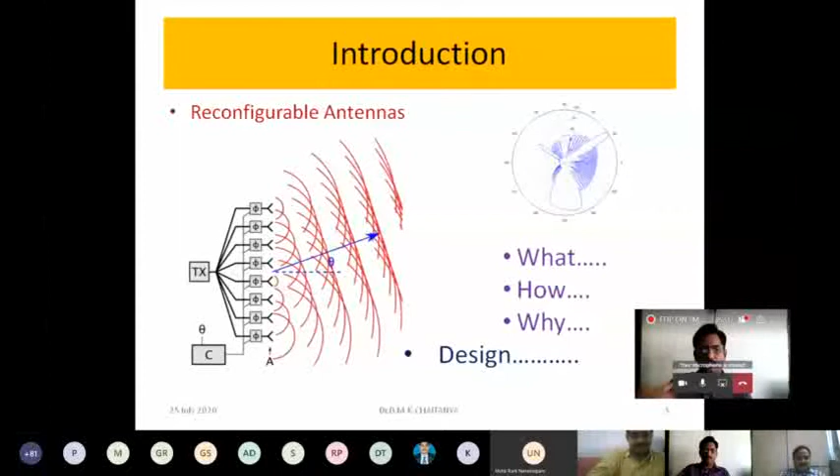Today let me start with some fundamentals as well as hands-on training with HFSS. I'll be using HFSS 15 version, an old version, but I'll give you the basic concepts. Design at RF and microwave frequencies has become more significant because of the evolution of new wireless standards as well as new wireless devices and technologies every day. So researchers found it more useful to work on the design of antennas rather than complex signal processing techniques. This has led to the design of reconfigurable antennas, which requires specialized antennas to make use of the electromagnetic spectrum very effectively. So the concept of reconfigurable antennas has come into existence.

Let me start with the design of reconfigurable antennas. First, let me start with the electromagnetic spectrum. I'll take a few minutes on the basics so it will be useful, and then we'll go into a different point of view. As we know, the EM spectrum is the range of frequencies or spectrum of electromagnetic radiation along with their respective wavelengths. To prevent interference between different users, the generation and transmission of radio waves is strictly regulated by national laws and coordinated by the international body, the International Telecommunication Union (ITU).

They have been assigning different frequencies for different services. Nearly 40 radio services are defined by the ITU. In some cases, the spectrum is sold or licensed to operators of private radio operators, cell phones, broadcast televisions, etc. Because it is a fixed resource in demand by an increasing number of users, the spectrum became so congested and needs to be utilized more effectively.

That is what we deal with in the new technologies as well as in driving modern telecommunications. So innovations such as spectrum management, frequency pooling, and of course cognitive radio are the new technologies being utilized to use the electromagnetic spectrum very effectively. So we should effectively make use of the spectrum.

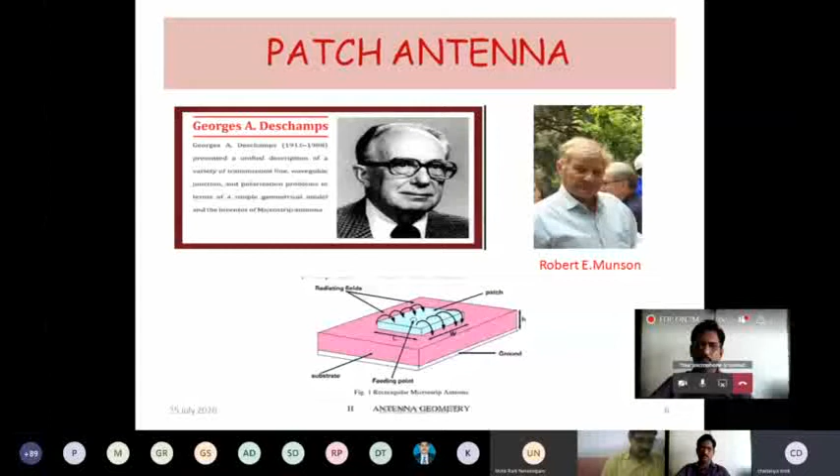Similarly, we have Zigbee, which works up to much lesser distances. Even Bluetooth works only up to 10 meters, with a data rate of only up to 1 Mbps. So these different wireless standards work with different data rates, ranges, and bandwidths.

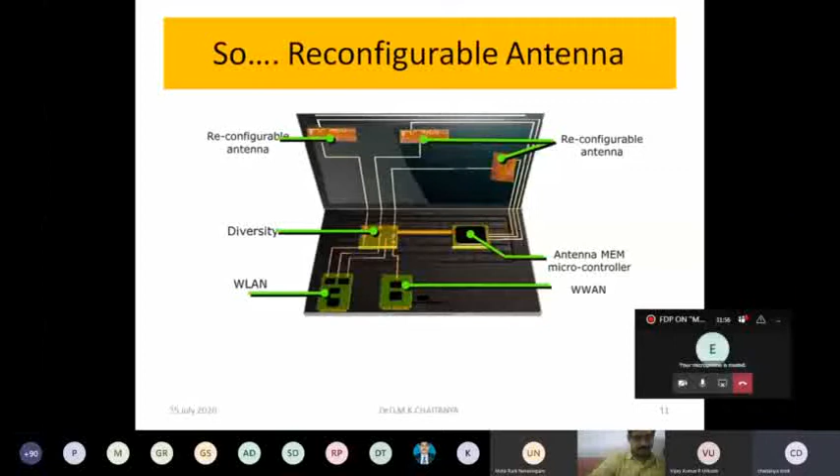Therefore, in order to support these different technologies and increase functionality, we need a single antenna - a reconfigurable antenna. What is meant by a reconfigurable antenna? It has the ability to radiate more than one pattern at different frequencies and polarizations. It can provide a diversity feature of operating resonant frequency, polarization, and radiation pattern without changing the physical structure.

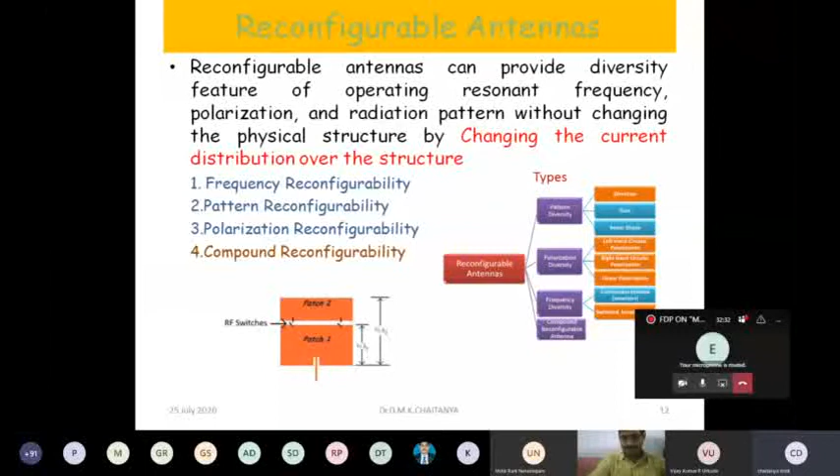How can we achieve reconfigurability? Only by changing the current distribution over the structure. What are the different types of reconfigurable antennas? We have frequency reconfigurability, pattern reconfigurability, and polarization reconfigurability.

Suppose the antenna is working at different frequencies, I just can use only one antenna rather than using different antennas for different frequencies. Similarly, using these antennas, I'll have only one antenna to radiate differently or in different directions. Similarly, the polarization reconfigurability, whether I need linear polarization or circular polarization, etc.

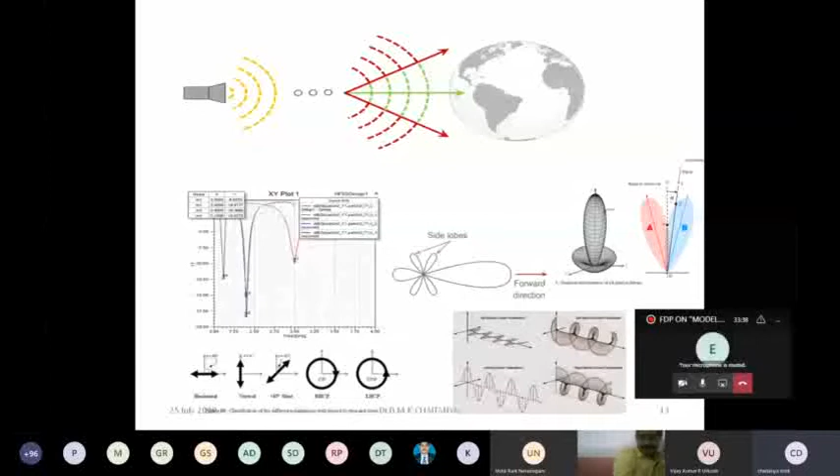Even yesterday also the experts have given the MIMO techniques and everything, which reduces the interference, which is useful for adaptive environments like cognitive radio, etc.

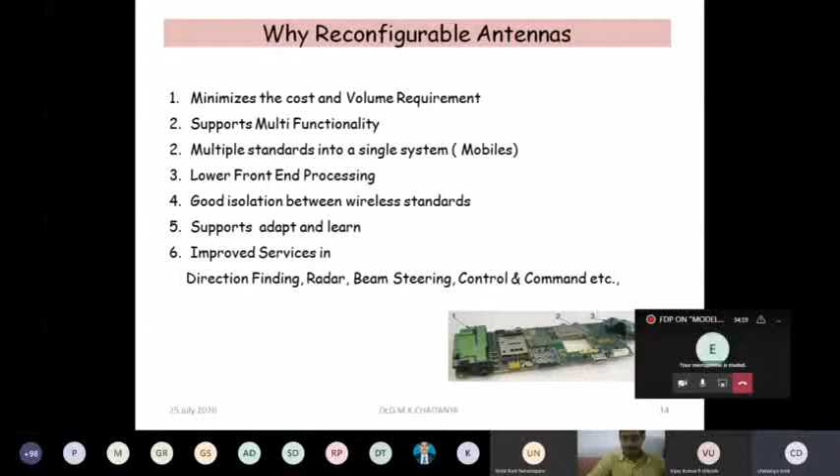Now, the reconfigurability, how to achieve the reconfigurability? It can be achieved by many ways, just like either by using electrical switching, or optical switching, or by changing the physical orientation of the antenna, or by changing the material.

Now, this is a fixed antenna structure. I am not going to change the structure, I am designing the structure like that. I may be using an electrical switch here or maybe optical switch, so that depending on the switching characteristics, the length of the antenna will be varying. In turn the current distribution will vary, therefore the antenna will be radiating differently with different resonant frequencies.

Now what are all the design considerations of the reconfigurable antenna? First of all, what are all the design considerations? The first one is the frequency. Similarly, the radiation pattern as well as the polarization.

I just want to tell a small thing for the young researchers here. The first most important factor to be considered for their research is the frequency — where it should be used, either for narrow band or wide band. Then we have to take these frequencies as per the guidelines of ITU, because most people select frequencies as they require.

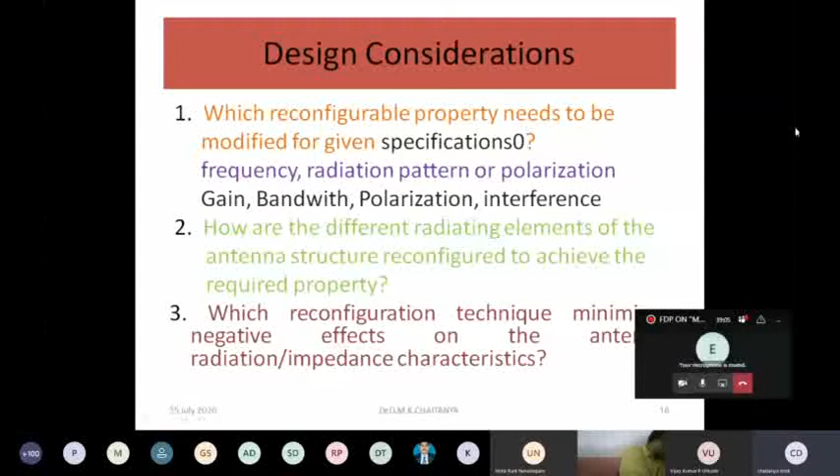So the general switching elements we come across in the design of reconfigurable antennas include RF MEMS, which uses mechanical movement in turn changed by electrostatic, magnetostatic, or piezoelectric effects. Switching means always on and off.

How do we achieve the on and off condition? RF MEMS can be switched on by using electrostatic, magnetostatic, or piezoelectric effects. Similarly, PIN diodes, in forward biased conditions, are in on condition; in reverse biased condition, they are in off condition.

Varactor diodes are similar to the PN junction diode, but here it is a variable capacitance. By applying a suitable biasing voltage, we change the capacitance, which in turn makes these switches either on or off. Similarly, photoconductive elements like lasers and LEDs can be switched on or off, achieved by using external lighting from laser diodes.

Whatever switching element we use inside the antenna, we can switch it on and off so that we may increase or decrease the length of the antenna.

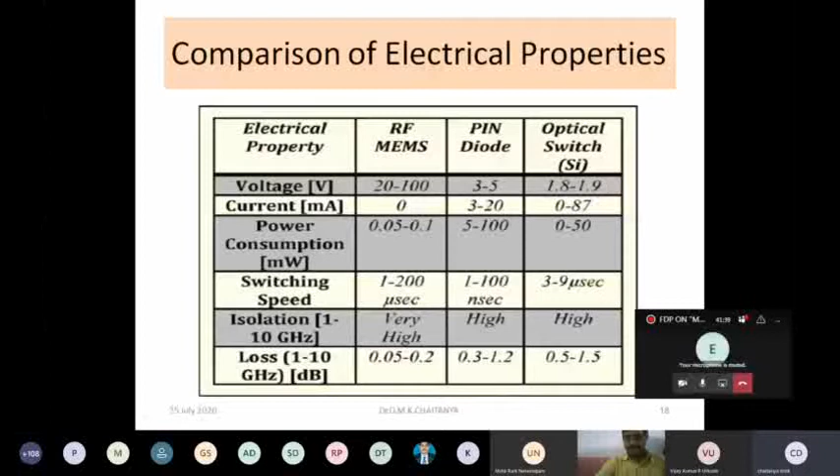What are the design challenges when designing a reconfigurable antenna? What is the biasing circuitry? If the biasing circuit or biasing network is complex, it makes the antenna complex. Why do we use biasing circuitry? In order to run these switches, to make them on and off, we require the biasing network.

This is given by vendors, or we may select it from anywhere. This is very important because it increases the complexity of the antenna. Similarly, increased power consumption will increase the system cost. There is generation of intermodulation (IM) products, which may result in increased interference. Similarly, switching speed is important to ensure proper functionality of the antenna.

Here are certain examples from the available literature on frequency reconfigurable antennas. You can see this antenna uses 4 varactor diodes. These are all the biasing circuits, which we have to drive in order to make the switches on and off.

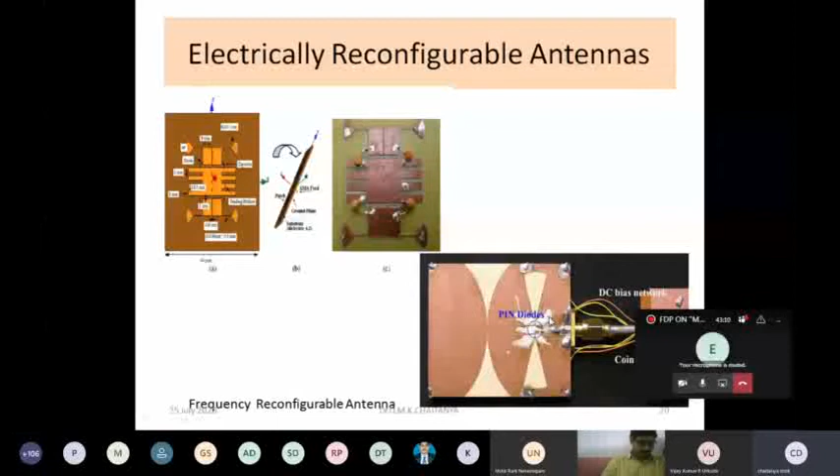Similarly, in one more design they have used PIN diodes, as you can see here, with the biasing circuit. This is an example of a pattern reconfigurable antenna, using different switches along with the biasing circuitry and bonding pads.

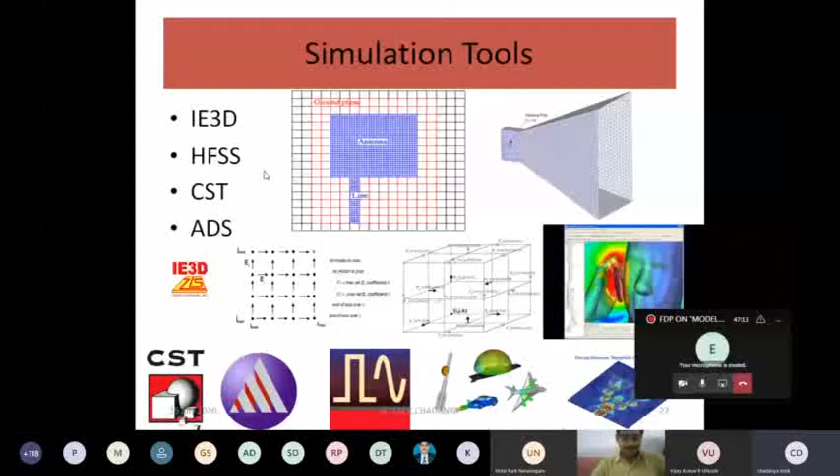There are different simulation tools available to carry this out, namely IE3D, HFSS, CST, as well as ADS. All these simulation packages are designed based on different computational electromagnetic techniques like FDTD, the finite difference time domain method, MOM, the method of moments, and the finite element method, as you are aware.

I want to mention one small thing about these computational electromagnetics techniques: all of them are based on Maxwell's equations only. But how do they implement the design? Suppose we use the FDTD method, which uses Maxwell's equations solved in differential equation form. Similarly, when we solve the integral form of these equations, the method of moments is implemented. Similarly, the FEM technique basically uses energy-based or energy minimization as a function. Of course, they each have their own advantages and disadvantages.

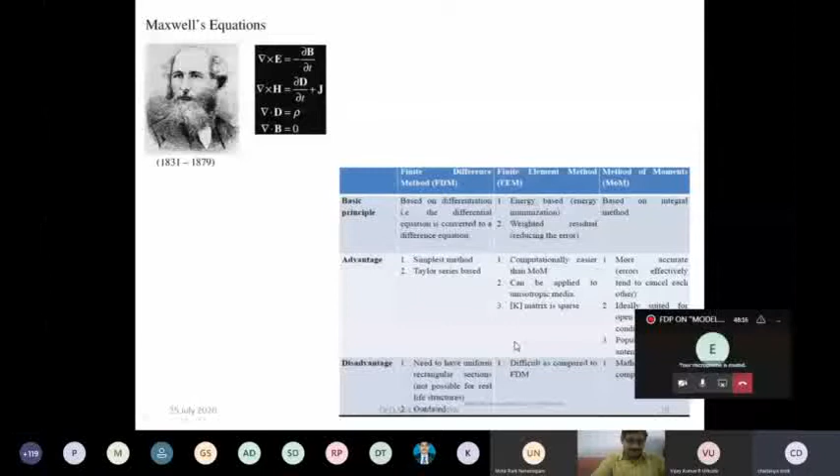Now, let me give a small point on how the finite element method works, because HFSS is based on the finite element method only. The finite element method basically divides the solving of the design into 4 steps. First is the discretization of the antenna elements into a number of subregions. Similarly, deriving the equations of each particular element, assembling all these elements and the solution region, and solving these obtained equations.

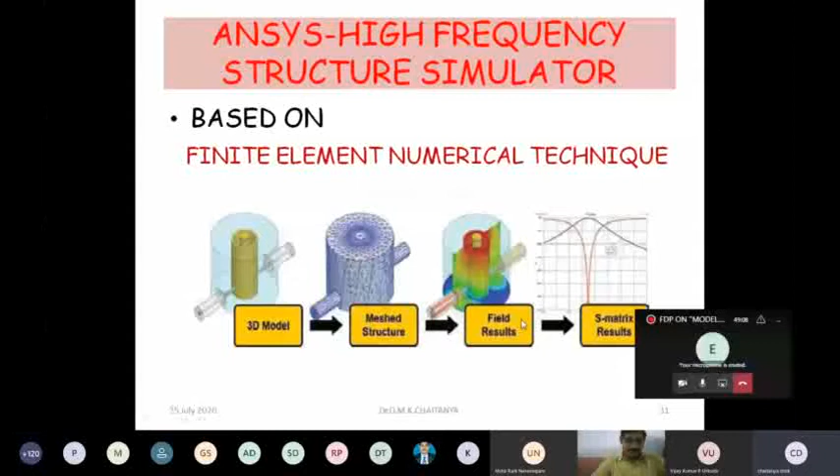Now, HFSS from ANSYS is based on the finite element numerical technique. The design is processed by converting the structure into tetrahedral meshes, and it calculates results based on energy functions. Now, what are the six steps that we have?

Basic design steps that everyone should remember: first of all, we have to create the model, then assign the boundaries, then go for the excitation, then set the analysis setup, then analyze and solve, then after that we get the results.

Now I just want to tell you about a small design of a compound reconfigurable antenna using ANSYS HFSS. Here I am using only the HFSS 15 version. Of course, there are the latest 19 versions which are sophisticated with different solvers and different kinds of applications, but we are not permitted to use them. Here I am using only 15. So let me start with this particular design.

Before going to this design, I just want to tell you two points: the dimensions of the antenna. Now here you can see these are all the dimensions of the antenna. They are calculated using the normal patch design equations. We have to calculate the width as well as the length, because of L effective minus 2 delta L. Why minus 2 delta L? Because of the fringing effects, it may be extended to L in this direction, so we have to remove minus 2 delta L. Therefore, we are calculating the dimensions of the length and width of the patch antenna.

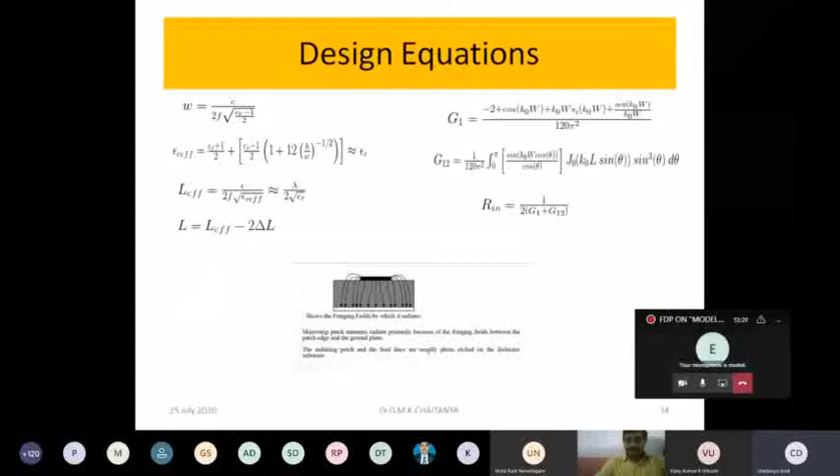Now, after that, I am using an inset feed here. In order to design the inset feed, we have to calculate the impedance. After calculating the patch length, the feed line characteristics have to be calculated, so we have to find the input impedance of the antenna. We have to calculate the edge impedance, because we have to properly interface the feed lines with the patch impedance. The current voltage ratio changes as a function of cos squared across the length, so the impedance from the edge decreases as a cosine function toward the center. This is one of the different feeding techniques, so I'm not concentrating on the theory here. This is the inset feed antenna.

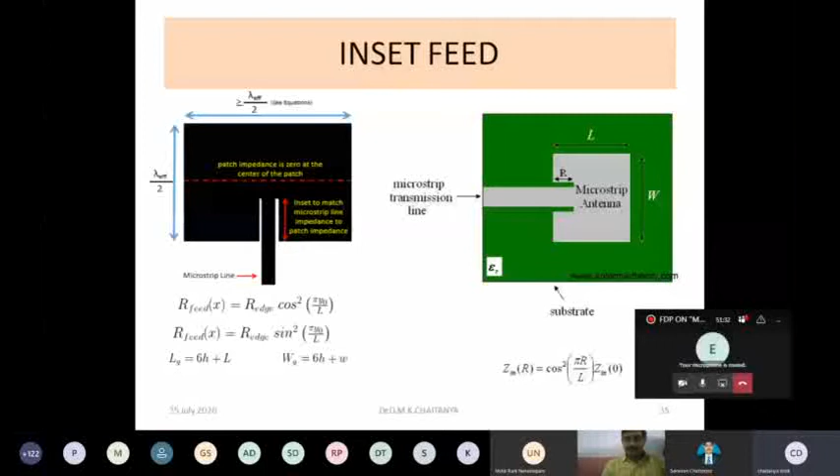Now these dimensions I am designing for 2.4 gigahertz. I have optimized these results to get the proper outcome, so keep that in mind. Now let me start with the design.

Sir, is it visible now? I think it's visible now. Yes, yes. Yeah, yes sir, now visible. Sorry participants for the small problem. Now I just want to show you.

I want to design this compound reconfigurable antenna. It contains, whatever may be the patch antenna, a substrate, then we will have the microstrip patch, then these are the feed. Now I am going to use two PIN diode elements here. We are going to see the compound reconfigurability. What is meant by compound reconfigurability? It is giving frequency reconfigurability, pattern reconfigurability, as well as polarization reconfigurability. The antenna can achieve all these things. We just want to have a small demonstration here.

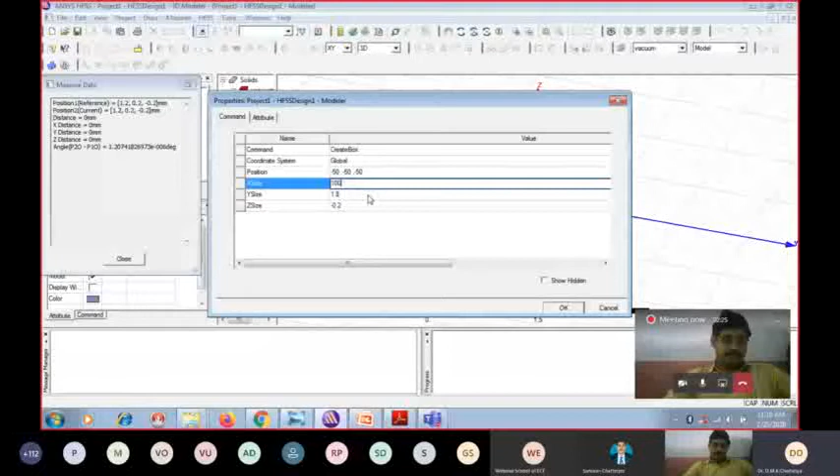Now let me start with the substrate. I'm just drawing a substrate here. Now, after this, this is the position. I am just taking it as minus 50, comma minus 50, 0 here. Then the length here I'm taking as 100, then the width as 100, and the Z size is minus 1.6. Why have I taken this value?

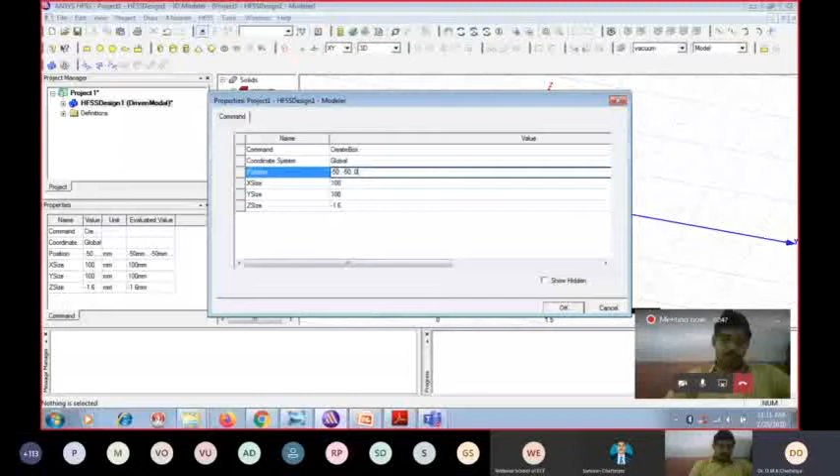You have to press Control D here. Now what I have done is, this is my ANSYS HFSS window. You can see we can create a project here, insert HFSS design. Then immediately we come to the project manager as well as a different window. Now what I'm going to do is, first of all, I'm designing this one. So I'll give you a small introduction about this. Actually, it is designed with FEM.

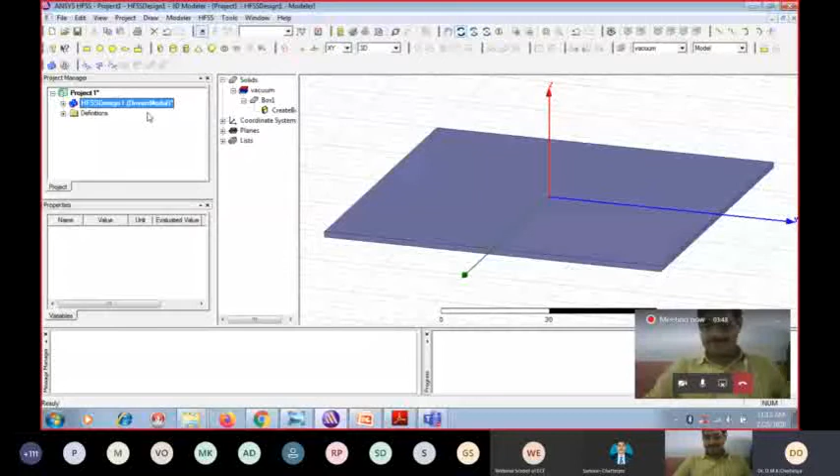Before that, we have to go to the modeler and change the units, though the default units are already millimeters. Similarly, we have different modelers; either you can go with the model or solution. I'm going with the driven modal, which is a different concept. We have different types of modeling techniques here. The modal is meant for TE design or TM design, whereas the default terminal model is meant for TEM-like different waves, which we have to use. Now I have designed the substrate. Then what I'm going to do is change its name to substrate.

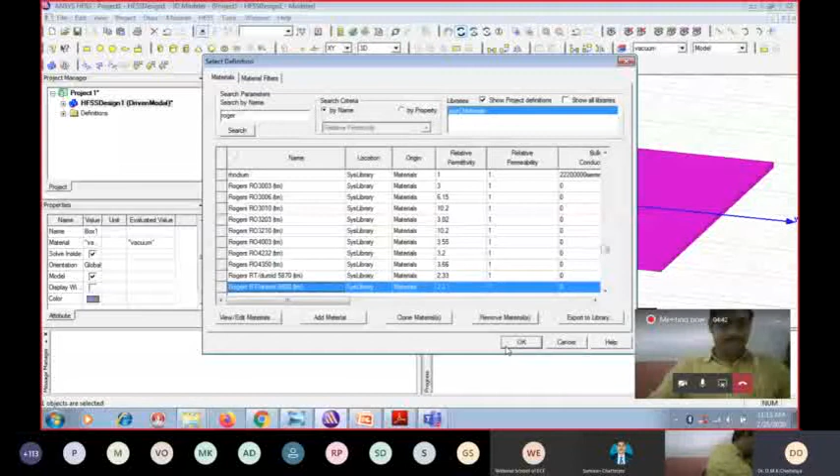So the material I'm going to use is RT Duroid, Rogers RT Duroid. You can see here, 5880, whose relative permittivity is 2.2. I am selecting this, then pressing enter.

Now I am just making it a transparent color, whatever color I can use, by changing the color here. You can see it now. So this is our substrate. I have created the substrate.

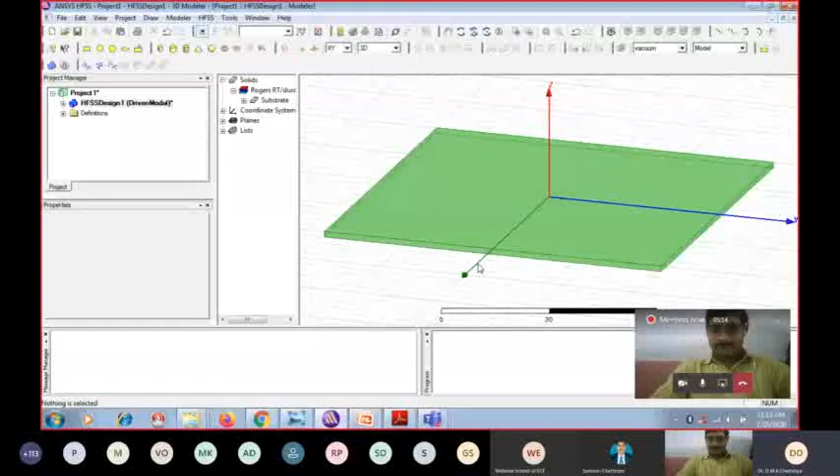Now, after the substrate, we have to create the ground. There are 3 ways to design the ground. The simplest method I am showing you is: select this face by entering the F value, and after entering, click it. Press F and click. Once again, I'll show you. Pressing F and selecting this, you will get like this.

Now what I am going to do is edit, here surface, and create object from face. So we are creating the ground plane here, or otherwise we could draw a rectangle, a vertical rectangular shape, but this is the simplest method.

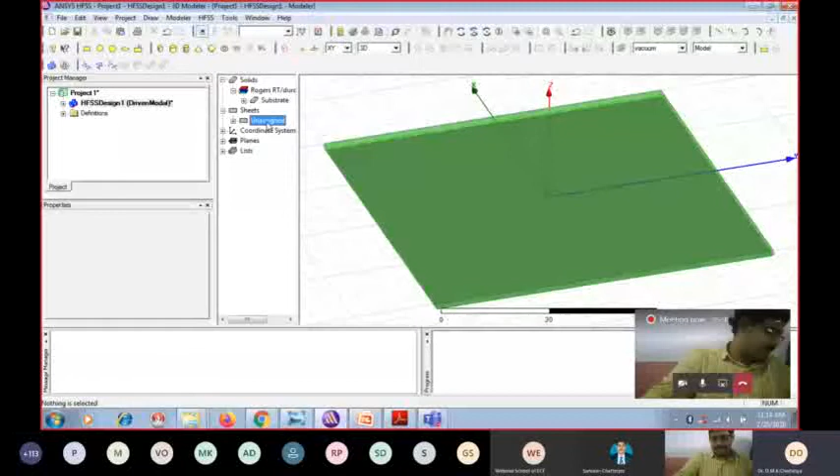Now this region you can see is the substrate, of course. And here we have got the ground. So the first step is creating the substrate, and the next step is creating the ground plane here. Now we have to assign the boundaries, which we'll see later. Now I'll create the patch here.

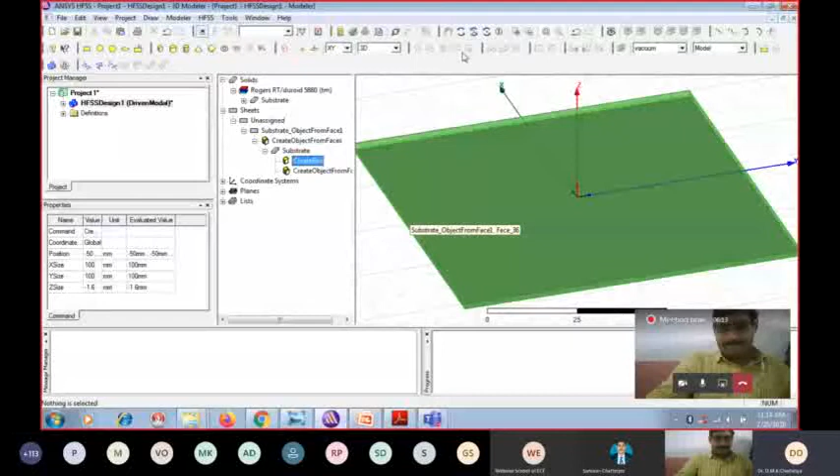Now we are going to create the patch. In order to create the patch, we have to select a rectangle here. Now what are all the dimensions of this rectangle? Now this is a patch. Now I am using a different color and some transparency, something like this.

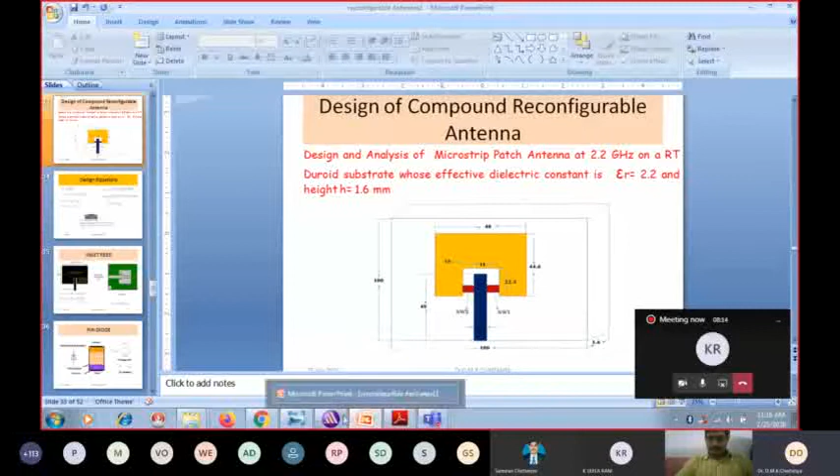Now we have created the patch here. Now our next step is we have to remove this place and attach these switches. Now I am drawing one more rectangle here, that is rectangle 1. I am taking it as a rectangle as it is, because I'll be subtracting this one to create this slot.

So the dimensions of this one are -5, -22.3 here. So this is what I'm going to do.

Now I have created one more rectangle onto my patch. Then I have to subtract this one, subtract the rectangle from this patch. Then directly it can be visible here. Subtract patch minus rectangle 1, so therefore you'll be getting the antenna like this. Now we have done half here.

Then the next step is we have to create the feed. I'm creating the feed here. Now I'm just changing its name. Okay, so first let me give the dimensions here: -2 comma -10 comma 0.

Now of course that is -40. That is the width here. What we are going to do is give this width and everything, of course.

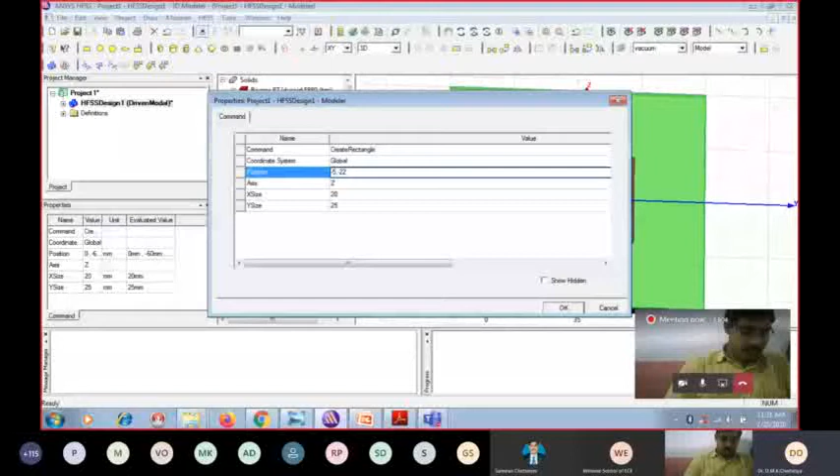After one second, let me show the design here once again.

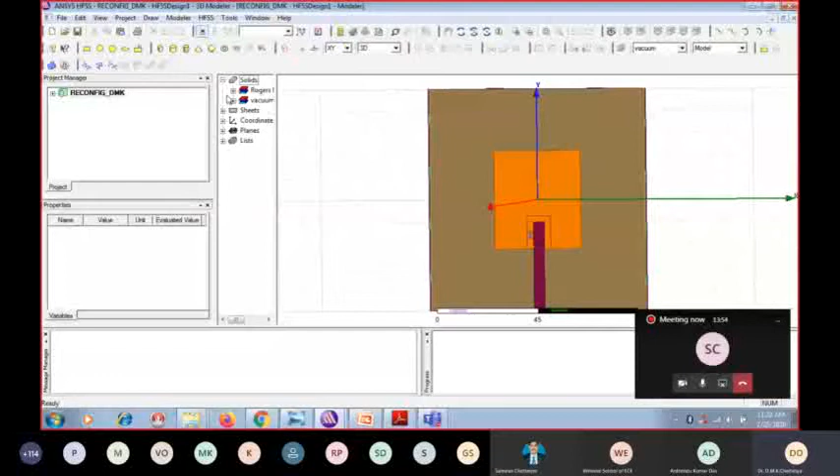Now what I'm going to do is solve this using Rogers material, which I have given. For the substrate, I'm creating the box with -50, -50, 0, and that's how I've taken the substrate.

Then sheets, first what I'm going to do is take the patch, with values -20, 22, 30. So first I create the patch here, then I create the rectangle, as you can see. This rectangle, if you subtract it from the patch, you can see the result like this.

We are designing this one. The next immediate step is we have to create the switches here. So how to create the switches? For that we have to see the pin diode switches, which consist of this.

It consists of two combinations: an inductor as well as a parallel value capacitance connected with resistance, in order to make the switch on and off. In pin diode off condition, we take these values: 0.6 nanohenries for inductance, 0.35 picofarads for capacitance, and 10 kilo ohms for resistance. Similarly, in on condition, only the inductance value and the resistance value will be there. We have to keep this in mind.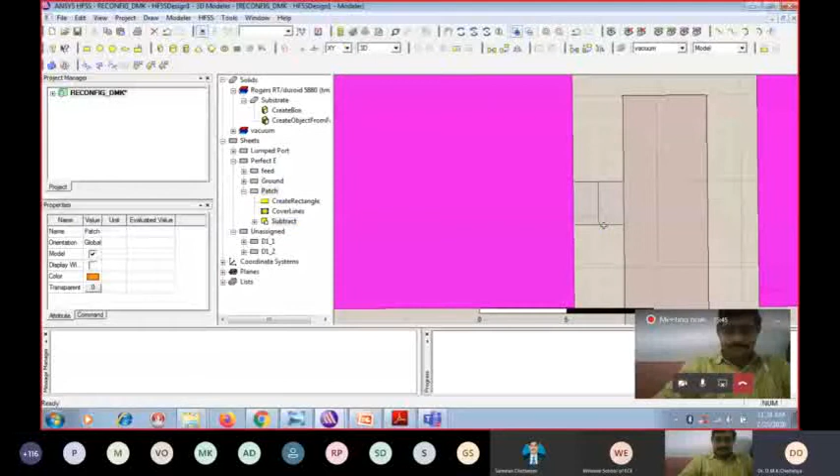So here what I am going to do is create this once again. Now you can see here, this is D1, diode 1. I'm doing the same here as well.

So how to create this one? Let me create a second rectangle. Suppose this is diode 1 here, and one more diode here. So the length, this one is diode 2. Now the values of this one I am taking as 3, -15, 0.

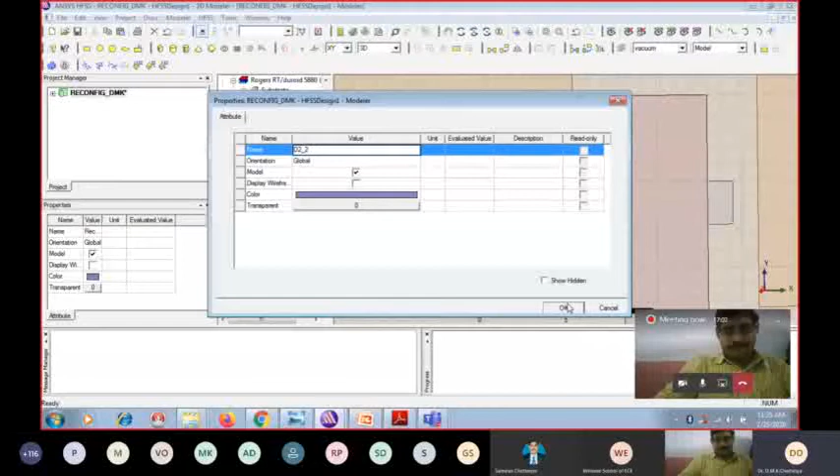You can see I have created one more rectangle here, and that's how I'm creating the pin diode switch. Similarly, I am creating one more diode switch here. Now the dimensions of this one I am taking as...

So I have created the switching elements. Overall, first we created the substrate, then I created the patch antenna and one more rectangle, and subtracted it from the patch antenna, then created the feed point, and immediately I'm creating these pin diode elements here.

So this is one pin diode. Now what we have to do is make these diodes on and off. For that we have to give the lumped RLC. So I'll show you how to assign the lumped RLC. Right click or select this one, suppose this one.

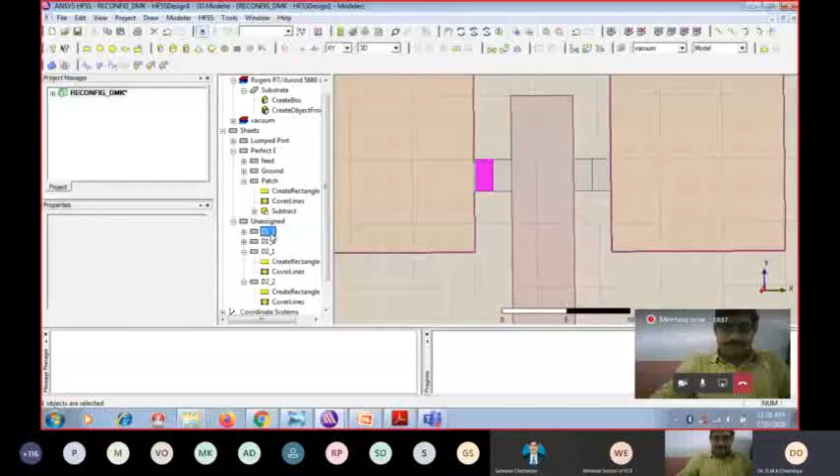Now I just want to make it an off condition. Keep in mind what an off condition is: it's a combination of inductance 0.6 nanohenries, capacitance value 0.35, as well as 10 kilo ohms. Then what we have to do is create this one here.

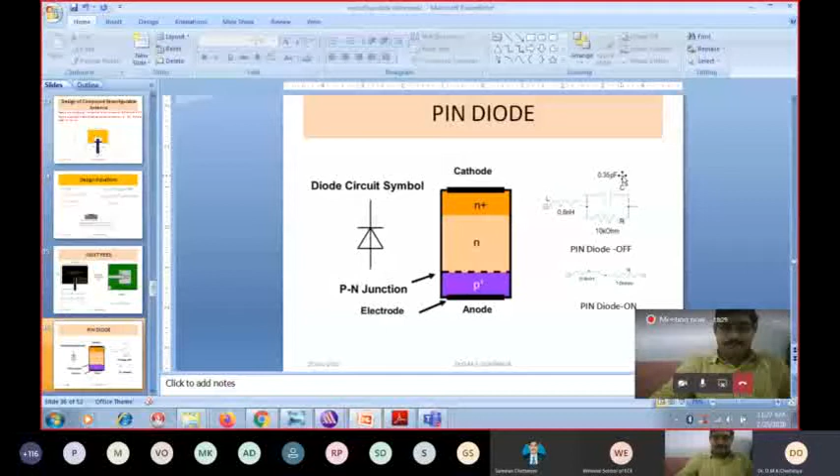Assign, now here assign boundary and lumped RLC. We have to click on the lumped RLC. And what are all the values that we are giving here?

Suppose I want to make the diode on-off condition. What I have to do is, first is inductance, that is 0.6 nanohenries or so. I'm making it like this, and I have to define this one. Actually, the current feeding from this one will be coming in this direction, so I have taken it in this direction.

So now similarly, these diodes I am going to set here. Once again I am going to assign the lumped RLC here. Now it is a combination of capacitance as well as resistance. The capacitance value is 0.35 picofarads in off condition. Similarly, the resistance value is 10 kilo ohms, since in off condition it is generally in the reverse biased condition.

So I am defining the line here, and from this direction only I am taking it.

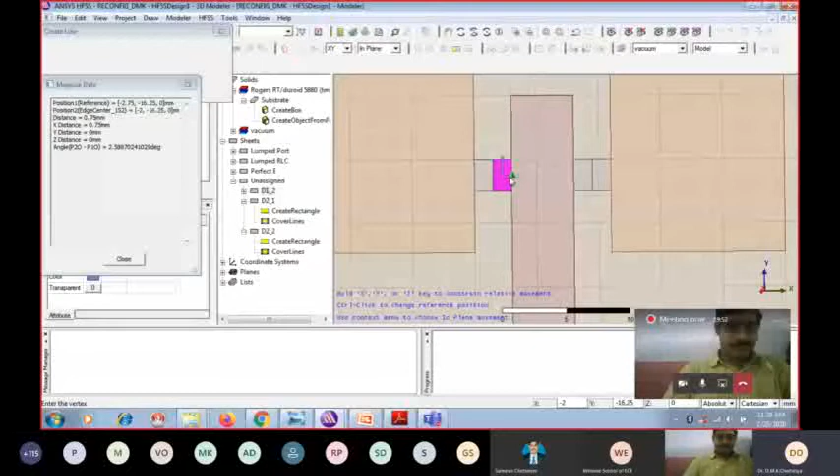So similarly, this is off condition. Once again, what I am going to do is assign boundary, lumped RLC. First, I am taking a resistance value, as well as capacitance value, as 10 kilo ohms, and capacitance value is 0.35 picofarads, and defining the line.

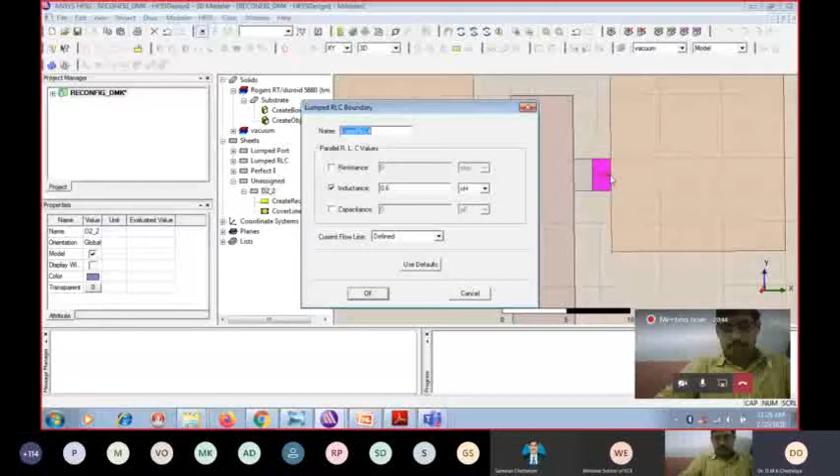Similarly, this is okay, and I am selecting this one, lumped RLC once again. Now, this value we are having, the only inductance value 0.6 nanohenries. So what we have done is press Ctrl D to achieve this one.

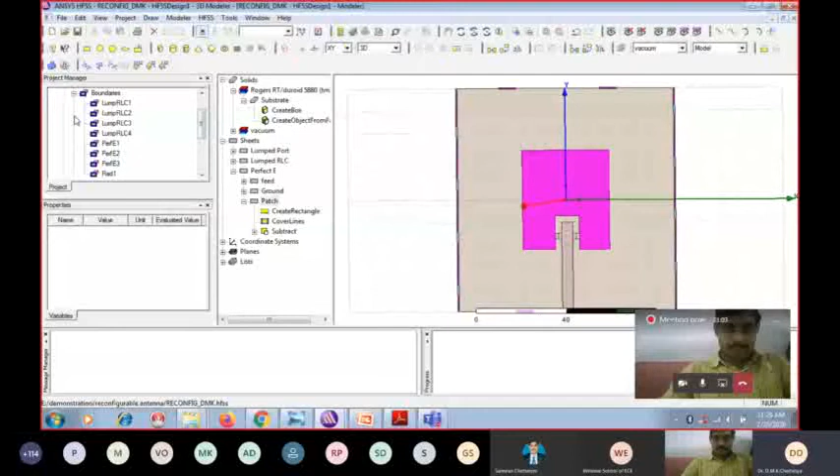Now here what we have to do is, so this is vertical. First we have to create the model. I have created the model. Then immediately what we have to do is we have to give the boundaries. Now see here, this is already, just you can see here. Okay, I'm removing this one. What we have to do is we have to give the boundaries.

I'm selecting this one. What you have to do is give the assigned boundaries perfectly here. So this is Perfect E. So that is boundaries assignment. That is the next step I have given you.

That is boundary assignment. Similarly, you have a ground here. Also, we have a ground backside. We have to take the ground. So here I am taking it as perfect, assigning boundary here. This is also I am assigning the boundary. So I have assigned the boundaries.

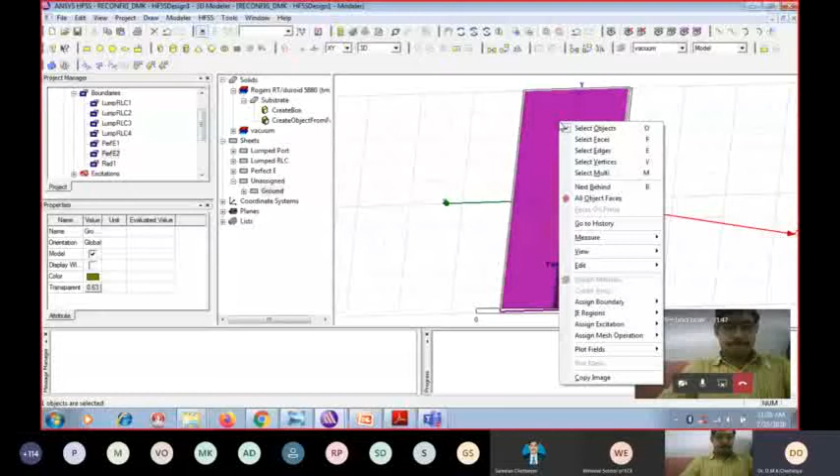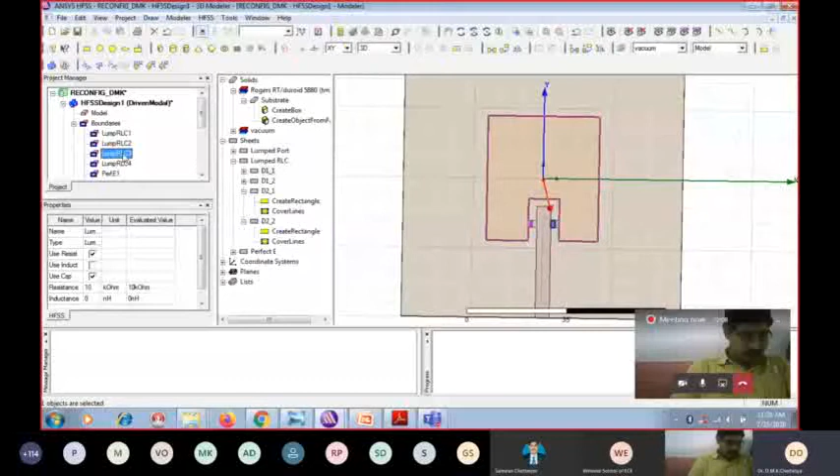Now what we are going to do is, this is your lumped RLC, you just can see here. This is RLC2, RLC3 and RLC4. Now in HFSS version 15, we don't have the option to create the automatic open region, but here I have to manually draw the vertical open region.

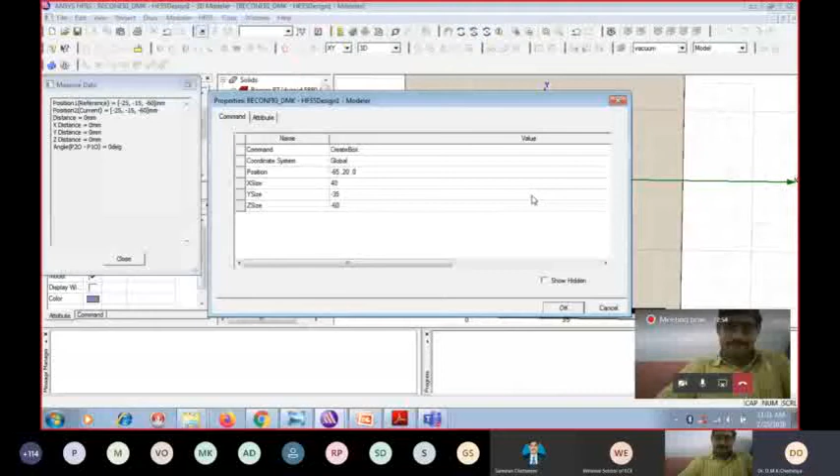Now what I'll be doing is I have to create the radiation boundary. What is the radiation boundary I have to create? So I have to draw the box. Actually in version 19 and above those versions, you will have a right click option called create open region, but here we will not have the create open region. That I am not permitted to use it here, so I am using this one.

So therefore, what I am going to do is I am creating a region, of course. So in the radiation box already created here, you just can see the dimensions I have created. I can see here from here. Let's say that is created. This is our entire region.

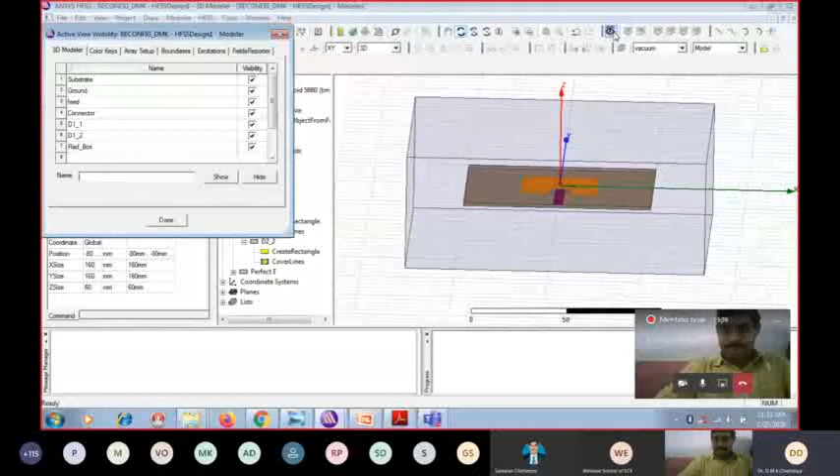The next immediate step is you have to create the analysis vertically, so we have to give the excitations. Now what we have to do is create the excitation here. Let me close this radiation box. What I am doing is going to the YZ plane, and I am creating a lumped port here. So here I have created a port.

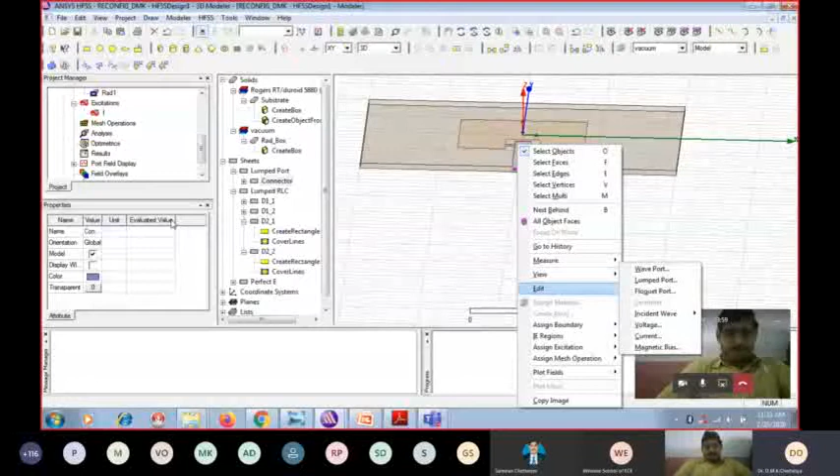Then what I am going to do is I have given the excitation as a lumped port here. Now what is this port? I have just already created here. This is creating a lumped port. You just can see the lumped port. So already we have created. Then otherwise I'll show you once again how to create this one.

Now what I am going to do is we are going to create excitation, lumped port, integration line. What I am going to do is I have to take it in this direction. So I have defined the lumped port.

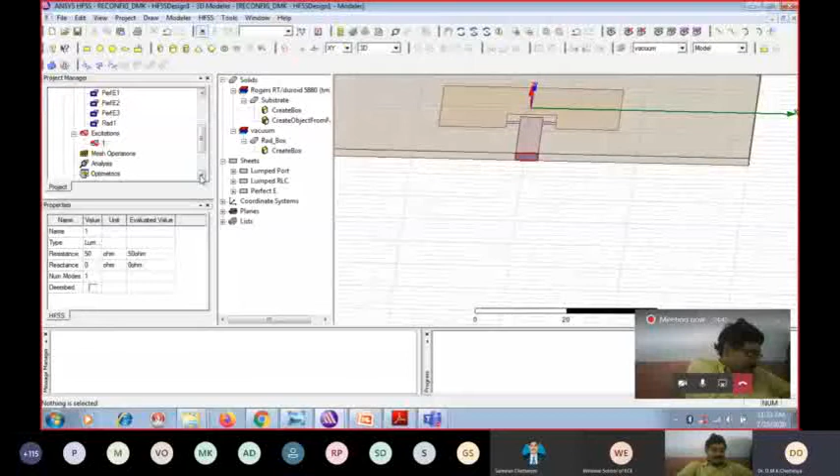So first step is boundaries we have created, excitation we have created, and similarly the analysis setup we have to give. Now what is the analysis setup, because this is the next step that we have to follow, that is add solution setup. Now here, the solution frequency I'm designing it for 2.4 gigahertz. This is very important here. Maximum number of passes I am taking as some 25. Default it is showing 6.

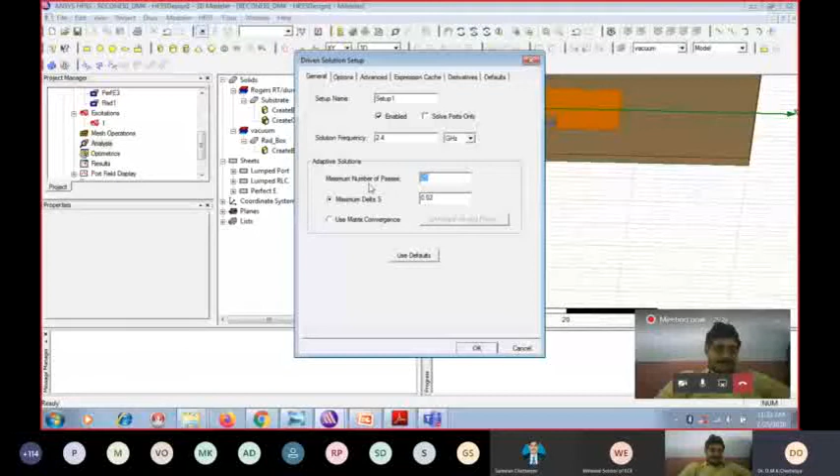What is the significance? I'll show when the results are there. Because the structure is creating the mesh like the grids, the tetrahedral pattern, if you give 6 or something, the solution will not be converged perfectly, so we will not get accurate results. Therefore, I am taking the maximum number of passes as 25 for this case. Now this I have selected here.

So we can see all the frequencies we are working with, the ones I have selected. Then, if you want to plot, you must save the fields. This is useful whenever you are going to draw gain versus frequency, so you have to save the fields, remember that. I'm clicking OK here. Now I have given the setup also.

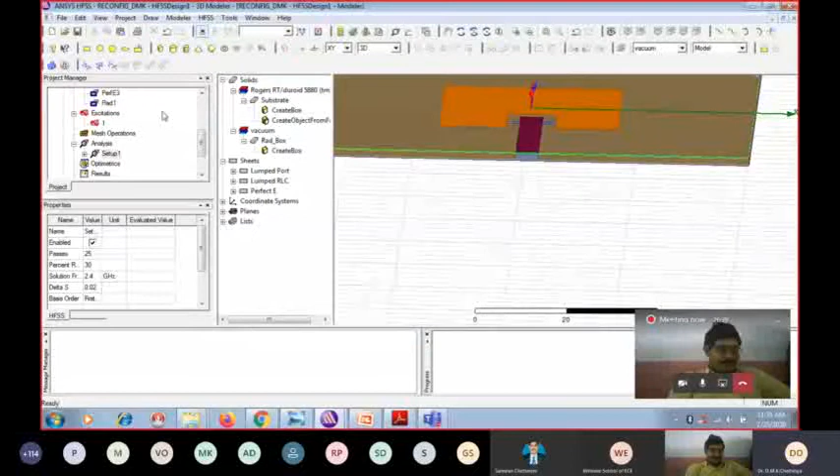So first we created the model and added the boundaries, then created the excitation, then the analysis. If you click here, everything shows up. Then I have to analyze it. I've already taken the ready-made values since I already analyzed it, because it takes some time.

First case, I'll deal with the reconfigurable antenna for the off conditions. Let's see the results. When both switches, switch 1 and switch 2, are in the off condition, this is the antenna off case. You can see the antenna here.

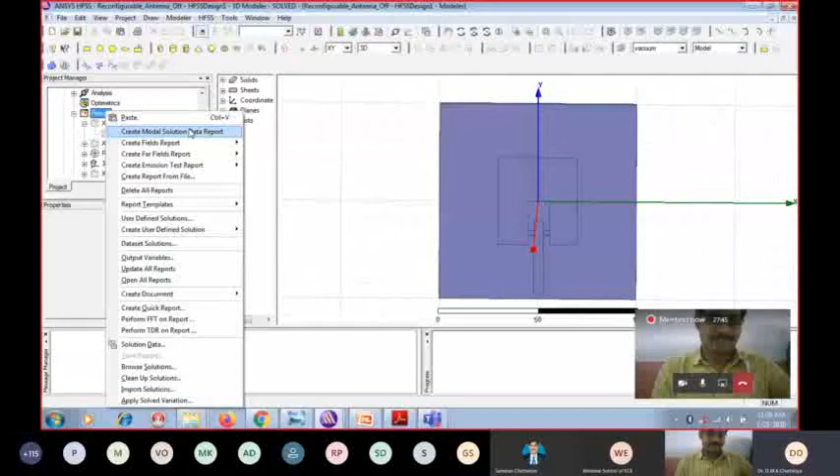I can create the results here: create modal solution data report, rectangular plot. You can plot this, giving S parameters in a new report. When both switches are in off condition, the antenna is working at 5.6 gigahertz. It is resonating at 5.6 gigahertz.

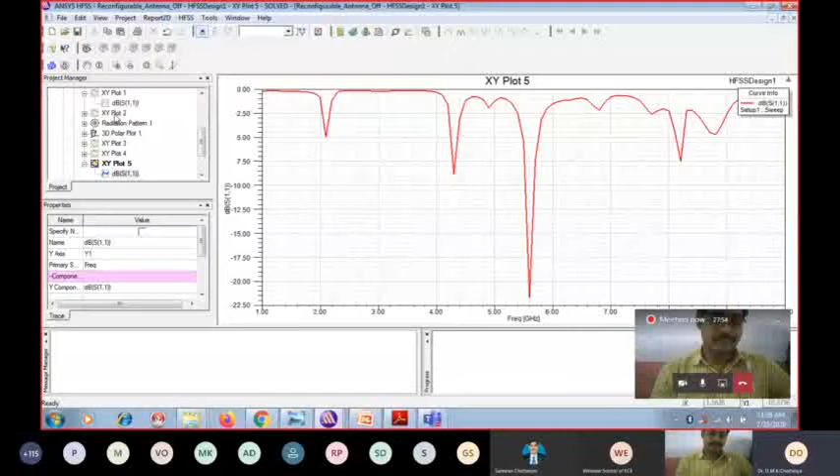And what is its radiation pattern? This is a 2-dimensional radiation pattern, and this is a 3-dimensional radiation pattern. I'll show you these results. So this is the radiation pattern we have got. The antenna is resonating at 5.6 gigahertz, and we get different radiation patterns here.

Now you can see the field overlays. I'm showing you the surface current density. If you want to see the surface current density, I'm showing it here.

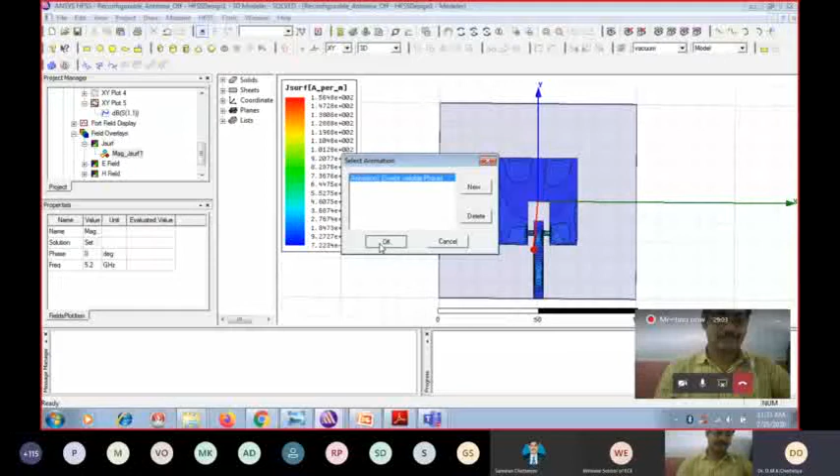You can see the antenna is resonating linearly here. The polarization is linear in this case. You can observe the plot here. This is the surface current density, remember.

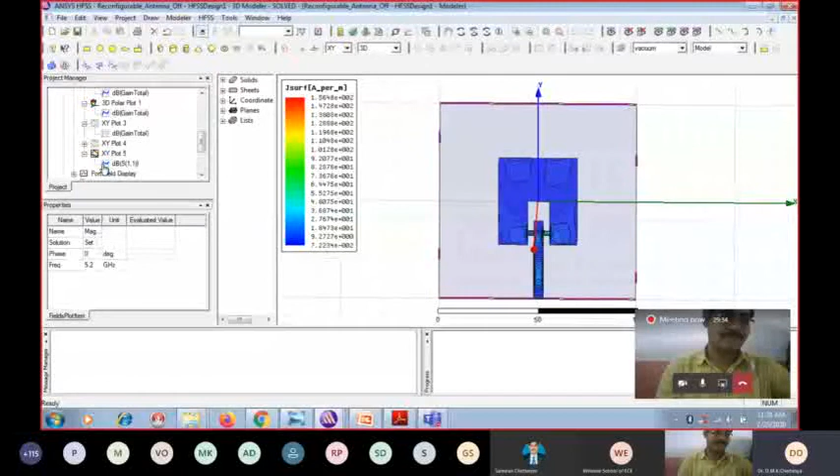So the antenna is resonating at 5.6 gigahertz and giving these radiation patterns, along with the gain values. This is the radiation plot. Of course, we cannot get the exact axial ratio values because it is linearly polarized. This is the off condition.

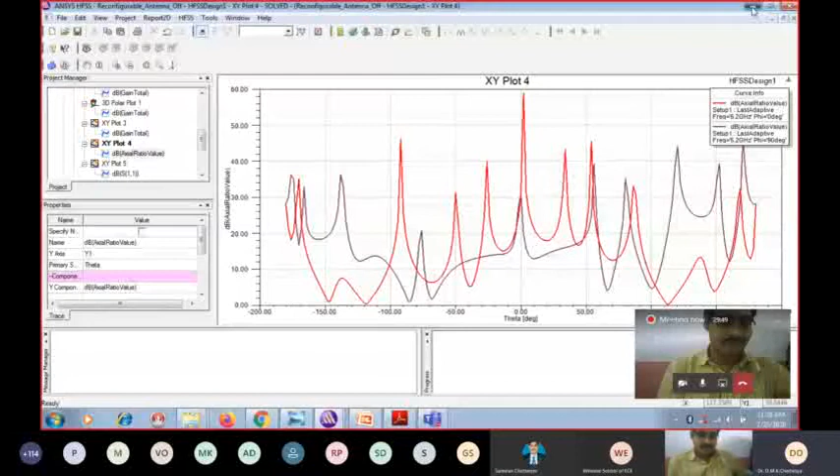Now, what I'm going to do is take both switches in the on condition. I've already taken the results to save time. You can see the antenna is resonating at 4.5 gigahertz. The radiation pattern is like this, and the 3D polar gain plot you can observe like this.

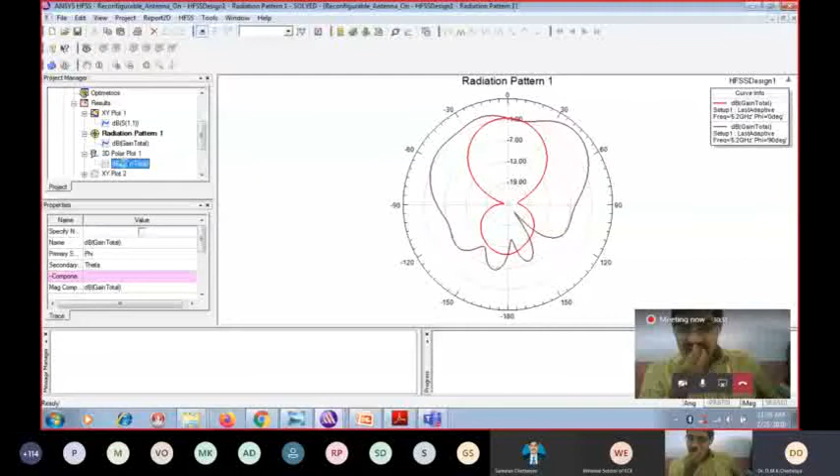Now this is also the current density. I want to show you the current density again here. In this case also it is a linear polarization. You can see the current distribution is linear, so this is also linear.

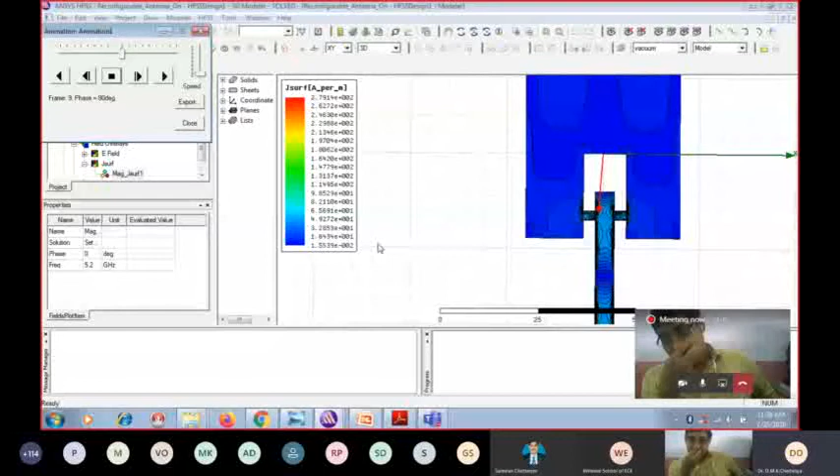So when the antenna is in off condition, it resonates at 5.6 gigahertz, whereas in the on condition it comes to 4.5 gigahertz, with linear current distribution in both cases. Now we will see two more cases, starting with switch one on. I am making only this switch on. Let's see what happens - this is the switch on.

You just can see the antenna is resonating. What frequency is it resonating at? It is resonating at 2.4 gigahertz, as well as 3.1 gigahertz. Whenever antenna switch one is in on condition, it is resonating at these two frequencies. Similarly, the radiation pattern also will be getting changed.

Now this is different compared to the first results. I'll show you in the PPT all these results.

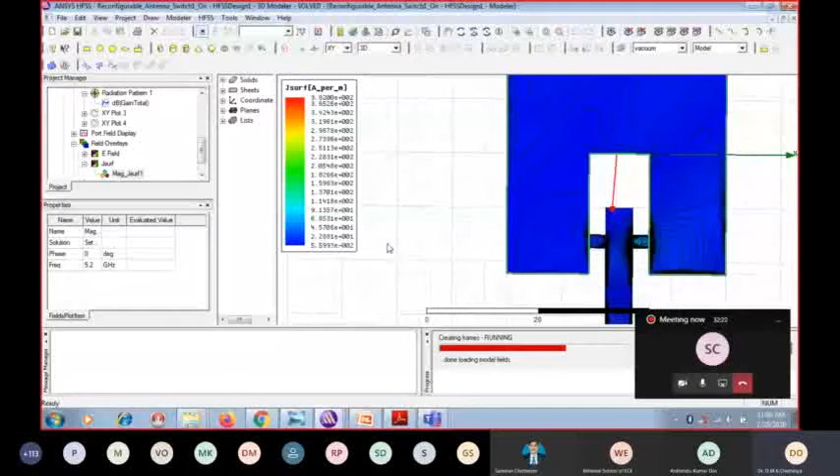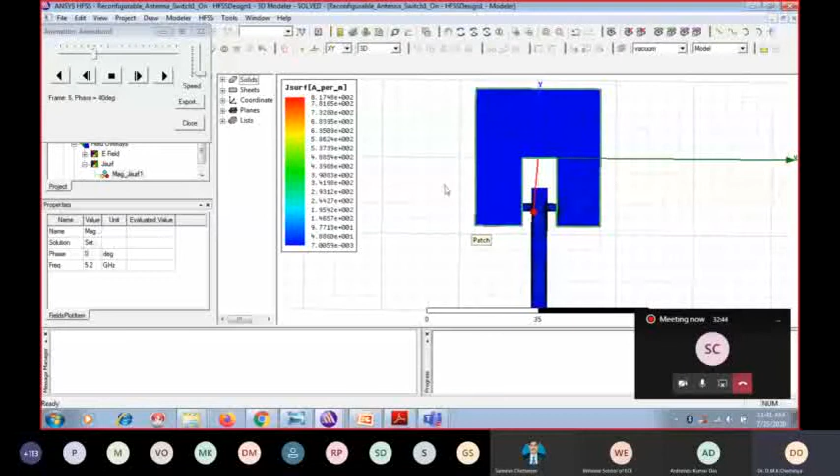Now what is the surface current density? You just can observe the antenna, it is left hand, the current distribution is moving in this direction. Whereas in the previous case it is linear, but in this case you can observe it is a left hand circular polarization here. You can see it is tilting towards left, moving towards left.

Similarly, whenever switch one is off and switch two is on, the antenna is resonating at different frequencies, 2.5 gigahertz and 3.2 gigahertz. Similarly, the gain plots you can see here.

Now this is a gain plot. The radiation patterns you can observe, this is a different radiation pattern. Now current density you can see here.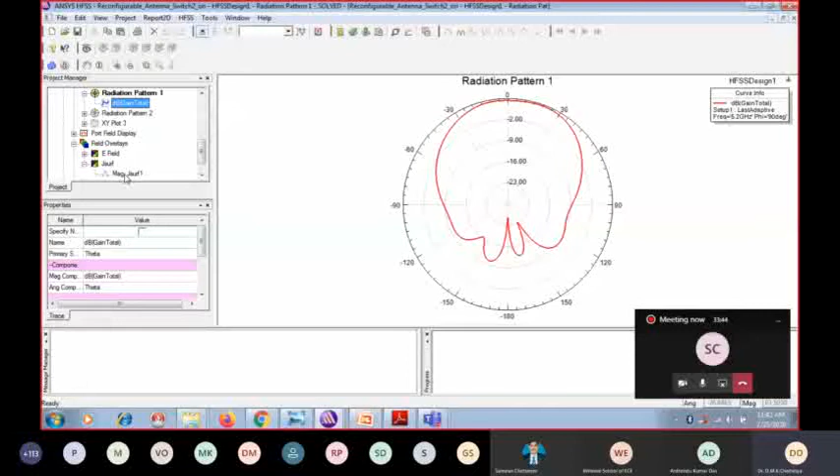Now it is completely different, the current distribution. It is radiating towards the right hand, so this is RHCP, right hand circular polarization we are going to get. You can see it from these results.

I'll tabulate this in tabular form. So when both switches are in off condition, the antenna is resonating at 5.6 gigahertz, and the return loss value is minus 21, and the peak gain is 6.27 dB for the case of both off conditions. You can see here.

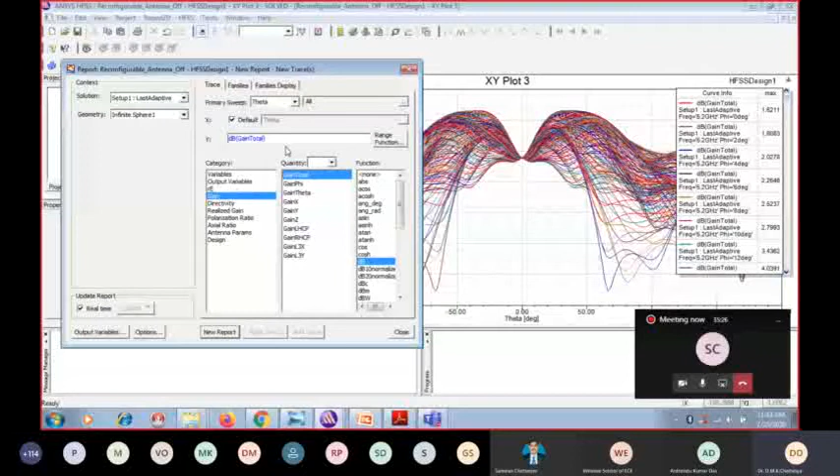Actually the gain value you can see from here. So these values, of course I've taken, its gain value, of course we can try it, no problem. You can see here, what is the maximum value and everything, and trace characteristics. I am taking the maximum values, of course we will have different gain values here.

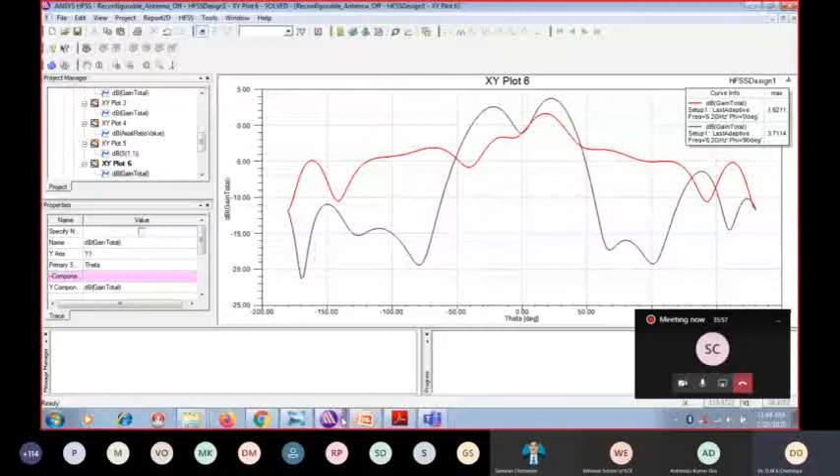Similarly, the polarization I am showing you is a linear value. For these applications, as I told you, it is working for mobile devices as well as radar applications. Whenever only switch 1 is in on condition, the antenna is resonating at 2.4 gigahertz as well as 3.1 gigahertz. Similarly, as I've shown you, it is working with RHCP, right hand circular polarization, and these are the return loss values, and the peak gain value also getting changed. Therefore the application is meant for Bluetooth and wireless LAN.

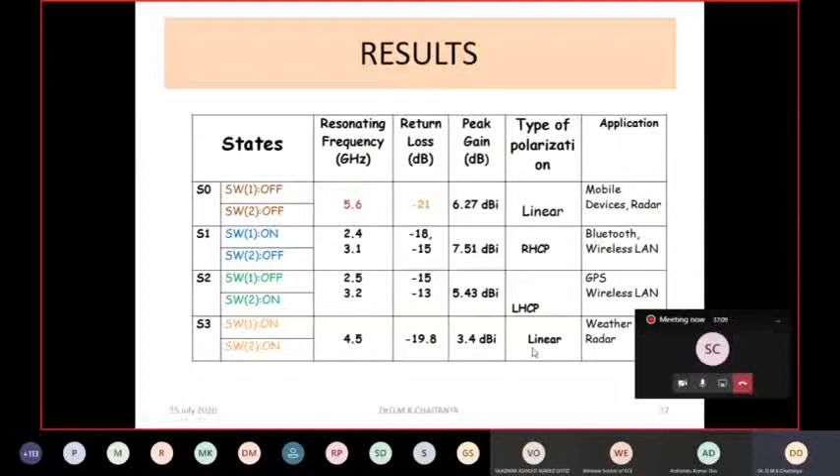Similarly, switch 1 off and switch 2 on, now it is working at two different frequencies, with peak gain of 5.43, so the gain value has changed. Similarly, you have got LHCP operation. Now for both switches in on condition, the antenna is resonating at 4.5 gigahertz, and the polarization we have seen is linear operation. Now these applications are meant for weather and radar.

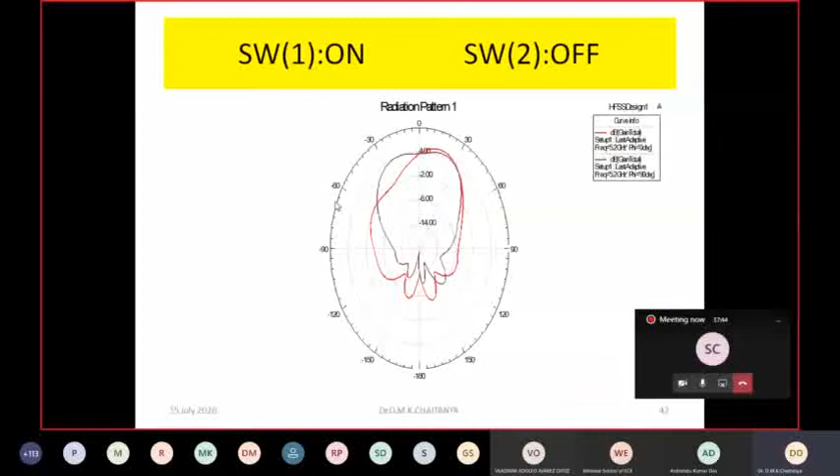So you can see the radiation patterns already, it is tilted in this direction, whereas here it is tilted in this direction. Similarly, both switches in on condition, it is resonating at 4.5 gigahertz, so the radiation pattern gets changed. Therefore, the designed antenna can be able to give frequency reconfigurability, because they are resonating at different frequencies.

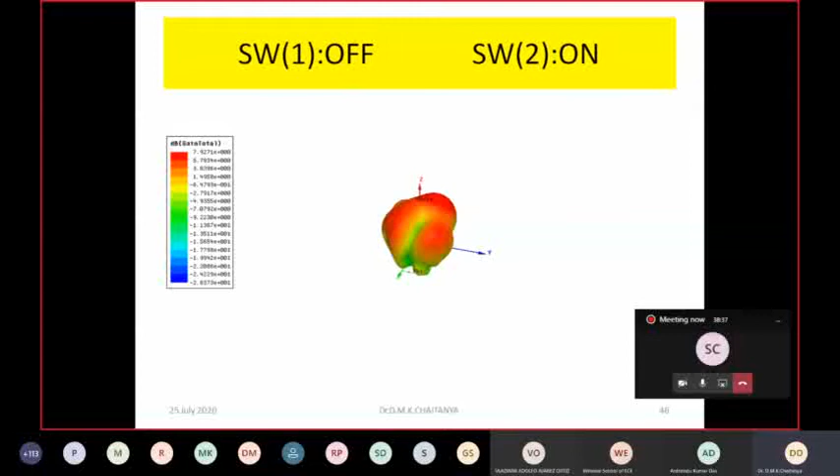Similarly, it is resonating, giving you pattern reconfigurability, because you can see it giving different patterns, you can observe here. So pattern reconfigurability, similarly the polarization reconfigurability that I have shown in the surface current distribution and everything. So the designed antenna can give all these reconfigurabilities of frequency, pattern, as well as polarization. Hence I can say it is a compound reconfigurable antenna.

Now, so this is about my presentation. These are all the references that we have used, right?

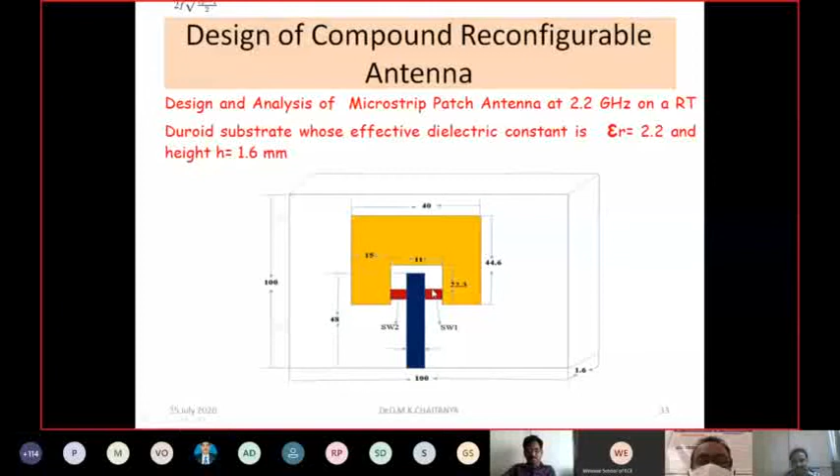Hello, who just asked the question? What is your name? This is Manish, sir. But you are registered in Webinar School of ECE, how do we find out your attendance? No, I registered as Manish Sharma, sir. You are registered, but in the Microsoft Teams app it is showing as Webinar School of ECE, so we are unable to find your attendance, we are unable to identify who is Webinar School of ECE. Please ping our coordinator and tell your correct name. Sure, sir, thank you. Thank you so much, send me your full name in a message. Okay sir.

Any other participants, please, any other questions? Sir, I have one doubt. How will we decide the values of inductors, capacitors and resistors for getting some switches, that's what we did in the PPT or presentation?

So while selecting the switches, first of all we should select the frequency of operation, suppose I am working for 6 gigahertz or 5 gigahertz. The pin diodes are different for different frequencies. So the first specification is the frequency, and we select from a vendor, maybe DigiKey or something. They will be giving you the on and off values in the data sheet, because the manufacturer only decides that. So majorly we have to select for the frequency of operation. The switch I have used for 6 gigahertz may not be useful for 10 gigahertz. These on and off values and specifications are given by the vendors in the data sheet, so like that we have to select. Thank you very much, sir.

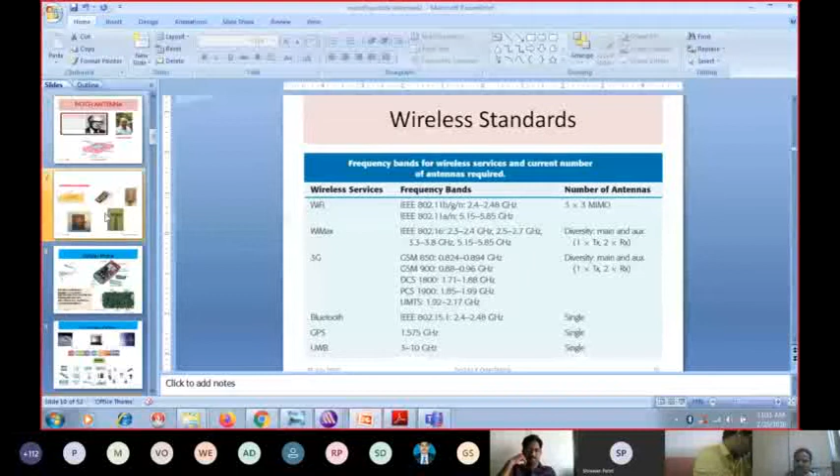The electromagnetic spectrum specification is given as per the recommendations of ITU only. All the frequencies, the allocation, whatever they have given, all these standards you can see here are given by the ITU only, so that we cannot decide ourselves. This is the IEEE standard spectrum. Whatever frequencies you can use are approved by the ITU only. I cannot use my own frequencies, because I may design my own antenna for defense application or a different application. So in order to avoid interference and for secrecy, we will not be allowed; we will be allocated certain frequencies only, purely controlled by the international regulatory body ITU. That's all. Okay sir, thank you very much, sir.

Sir, I have one question. Here in this case, you used inset feed.

Can you use quarter wavelength feed? Yeah, definitely you can use, but depending on the shape of the antenna, that's what in the design challenges slide I have shown you, that is where to keep the switching element. How do we achieve reconfigurability? By placing the switching elements. So where you place the switching element is of most prime concern. You have to keep some place for that.

So if I am using rectangular patch antenna, then I can't use pin diodes, because in quarter wavelength there is no space between the patch and the quarter wavelength line. What you can do is create a slot and place the antenna there, you can insert the antenna.

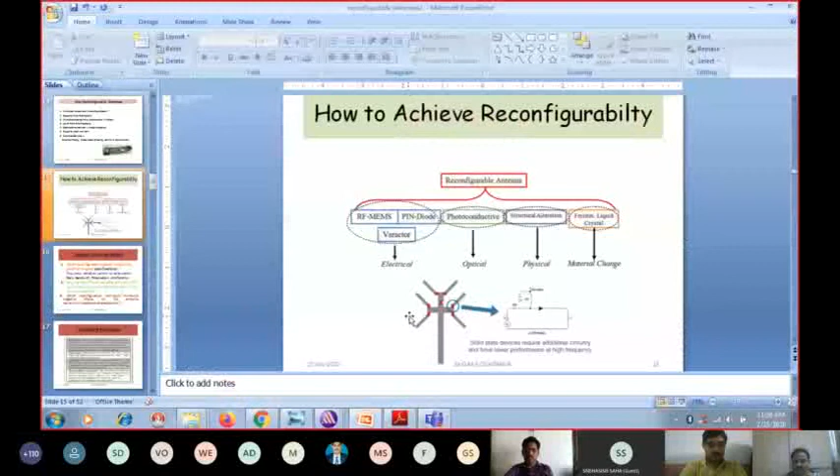One thing I can say is, when we are designing the vertical pin diode section and everything, we cannot put the bias lines, and of course you can do it, but here the simplest method is to use the lumped RLCs. Whenever we are using biasing lines and everything, it will affect the performance of the antenna also. So here what we are using is the lumped RLCs, that's what I told you. You can see here the lumped RLC I have given. Whenever you go for these type of connections, it will definitely affect the performance of the antenna.